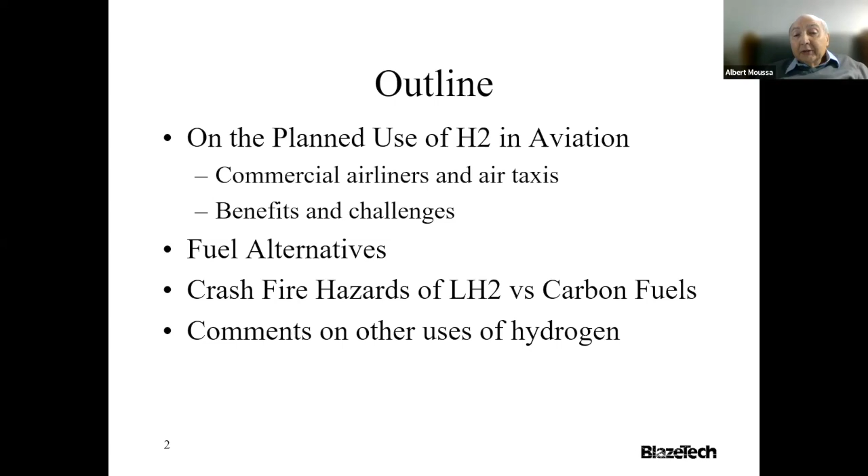Thank you, Ron. You've heard the title of the talk. I'm going to talk about the planned use of hydrogen in aviation, covering commercial airliners as well as air taxis. I'll talk about the benefits and challenges of each, and compare hydrogen to other fuel alternatives. Then I will present a quantitative comparison of the crash fire hazard of liquid hydrogen versus carbon fuel. I'll end with a few comments on other uses of hydrogen, particularly blending it with methane, as well as its use in transportation like cars and trucks.

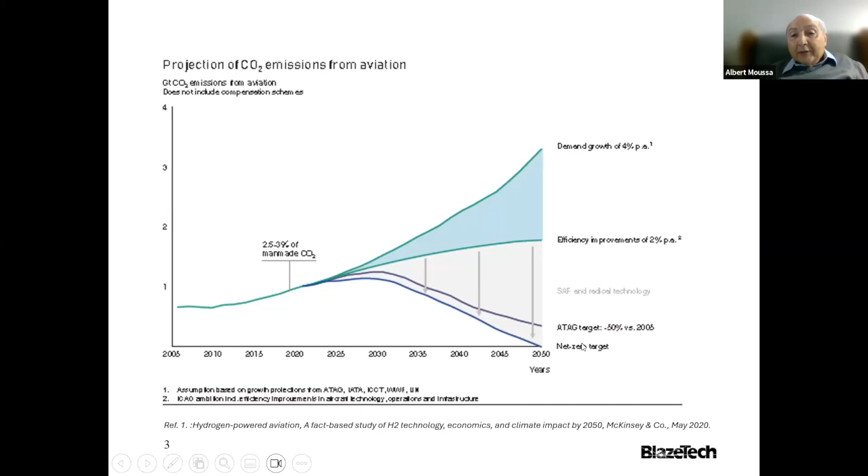Now let's look at what emissions come from aircraft by various species. These emissions happen at high altitude and produce contrails, which you can see at the bottom of the slide, and that's not desirable. I'm showing CO2 emission in kilograms per kilogram, comparing jet fuel with green hydrogen - and all we're going to talk about is mainly green hydrogen. So obviously going from 14 to 0 is a big change.

If you look at water, water will actually increase if you use hydrogen - about 30% more, going from 6 to 9. NOx emission is in the order of ppm either way, except that if the hydrogen plane uses fuel cells instead of engines, it could go to 0. Likewise for soot, it goes from traces to 0. Mind you, these four elements I listed can also trap radiation, and the bottom three constitute almost a doubling of the CO2 impact. So you can't only look at CO2 emission.

Now, if you have liquid hydrogen on a plane, it has to boil off, meaning it has to evaporate to make up for heat input to the plane over time due to the hotter air outside. The estimate of that boil-off is 1 to 3% per day from the tank, meaning pure hydrogen vapor will be shooting out into the atmosphere. Now, the global warming potential of hydrogen is 12 times that of CO2, so one has to integrate all of that into the comparison.

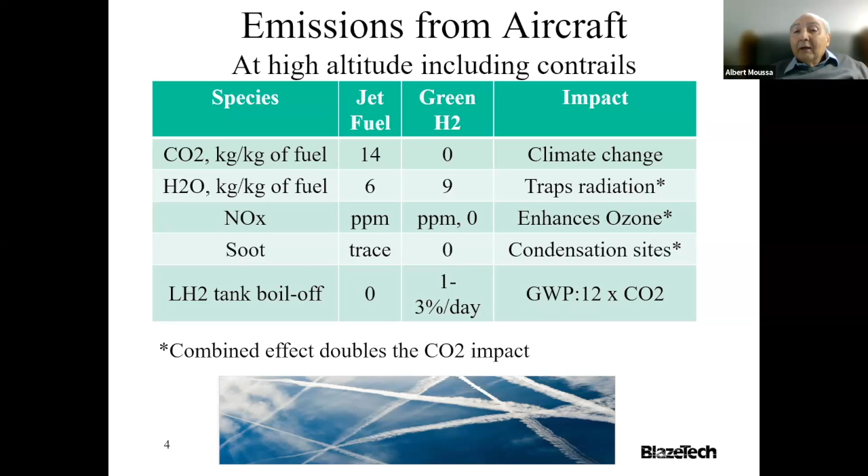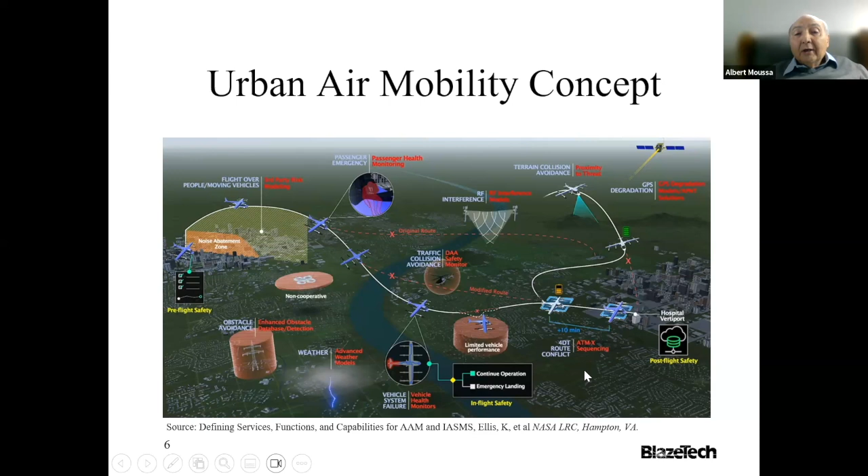What you have is a lot of very small vehicles, some manned, some unmanned, that will drop cargo at your home or serve as air taxis. For that to happen, there will need to be a lot of heliports at different locations within the city, along with storage—some for hydrogen, some for electricity.

Now, the two kinds of vehicles I'm talking about are the cargo vehicle and the air taxis.

The cargo vehicles you've probably seen are all rotor driven, very light at 55 to 100 pounds, battery operated, and unmanned. Some have already been certified to operate in suburban and urban areas, since the FAA is concerned about them crashing and hurting people.

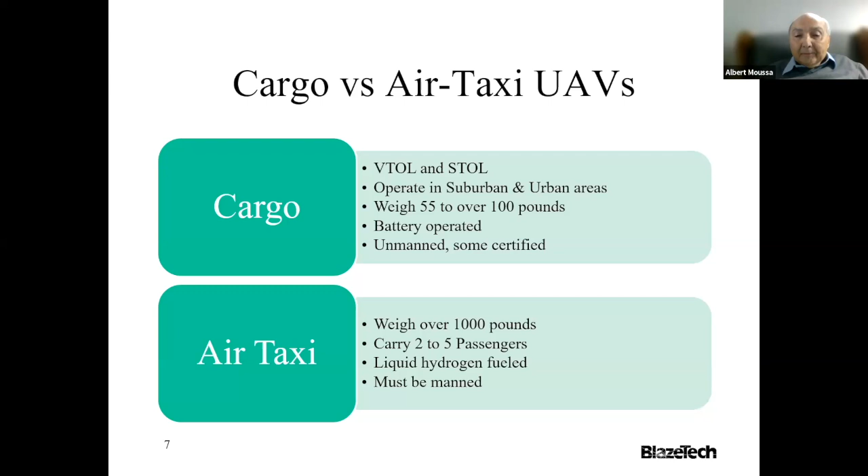The air taxis will be much heavier, 1,000 pounds and up, carrying 2 to 5 passengers. So far, the thinking is they'll use liquid hydrogen fuel, since you need hydrogen in a very compressed, small volume, and they'll be manned.

Here are pictures of the cargo UAVs. They all have rotors—you can see the ones by Amazon, DHL, and Flytrex. Some have already been certified and will come to your home to drop cargo in your yard.

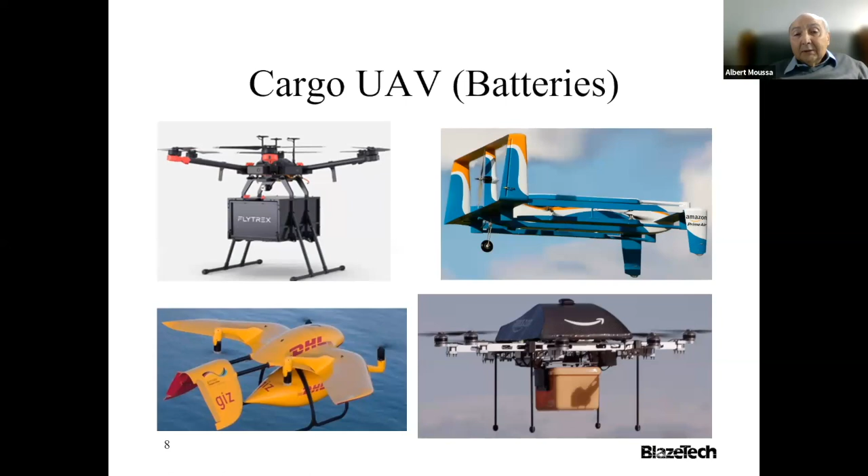The air taxis are really different and will essentially replace helicopters. That's the idea. Joby is the biggest player in this, and they just bought H2fly, which had a recent demonstration that went 500 miles. Most of these will be less than 500 miles, more like 100.

Look at the design of the plane. In the H2fly, it's got two fuselages, and in the middle, another fuselage for the propeller. The pilot and passengers will be on the right side, and the circle indicates where the hydrogen is.

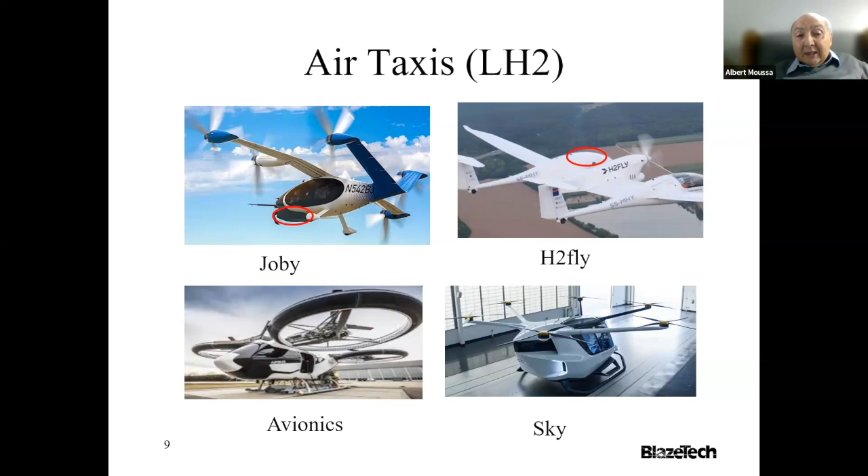So imagine how different is the design of the plane to accommodate the hydrogen. If you look at Joby, the hydrogen tank is under the fuselage, and so is it in the other ones. Again, that tells you you're going to be really developing new designs just to handle the hydrogen, and obviously there are complications in how to prove that they're safe, etc.

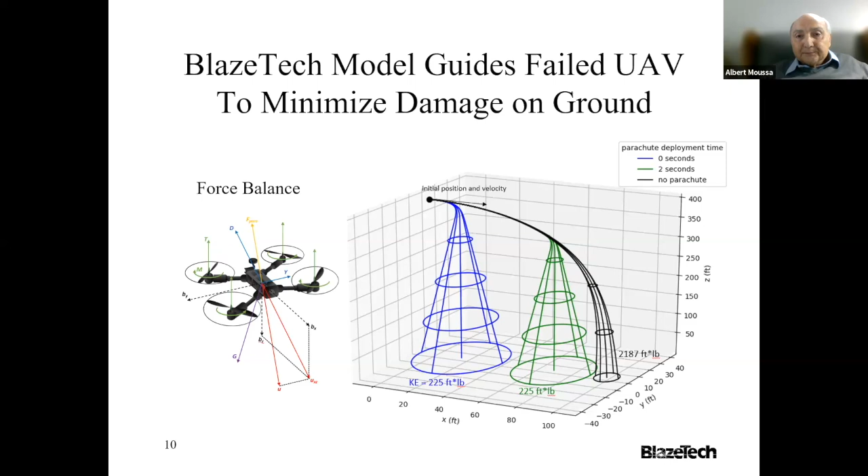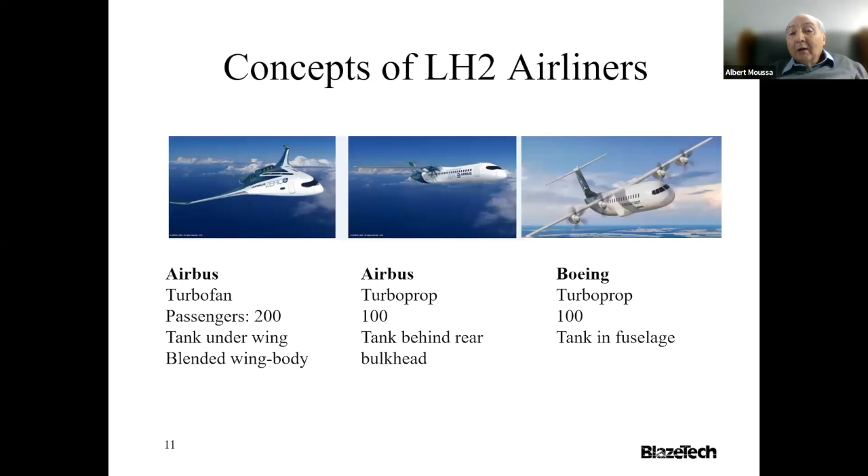Now, when you talk about hydrogen, it's important to think about what source it is, and some of these sources now are given a color. So we've been talking about green hydrogen, which essentially comes from a source like wind or solar, which provide electricity, but it's intermittent. Therefore, you want to be able to store it, and it's more efficient to store as hydrogen as opposed to batteries, and cost-wise as well. But to do that, you have to hydrolyze water, and that gives you hydrogen - that's your green hydrogen.

Now, the gray one, you are using methane and steam, and basically you are reforming the methane through the gas shift reaction, and that gives you hydrogen and CO2. So that's why it's gray, because it's not as clean as green hydrogen.

Now, there are other sources of hydrogen, including naturally occurring, which comes from the earth or the ocean, but these are very new. The old ones, of course, are coal gasification, which is not very desirable, or the blue one, which is again natural gas like the gray, except you capture the carbon. So that is better from an environmental point of view. And of course, you could use nuclear power instead of electricity to drive the hydrolysis reaction and get green hydrogen.

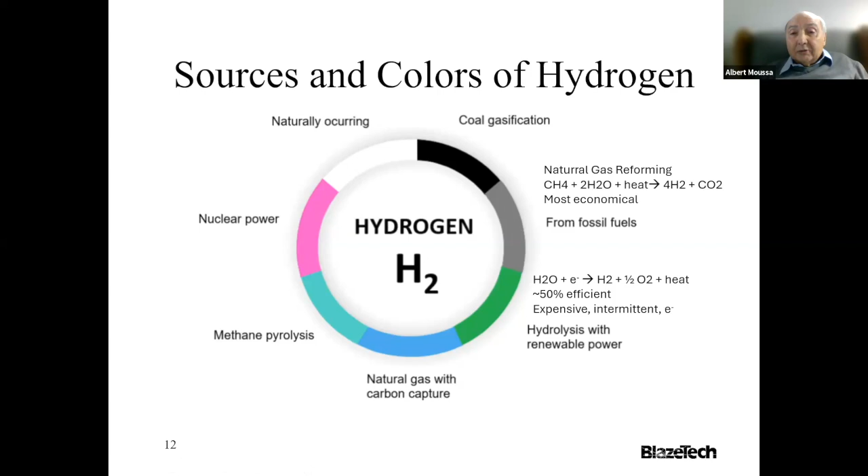Now, the engine efficiencies between the turbine you could have in a normal plane versus a fuel cell, which are really better engines for hydrogen since they take full advantage of it, is quite different. You have gasoline and diesel, but we're not going to talk about that now. If you look at the gas turbine, there's a whole range depending on the conditions and the type of engine. So 20 to 30 is probably reasonable, and fuel cell 40 to 60.

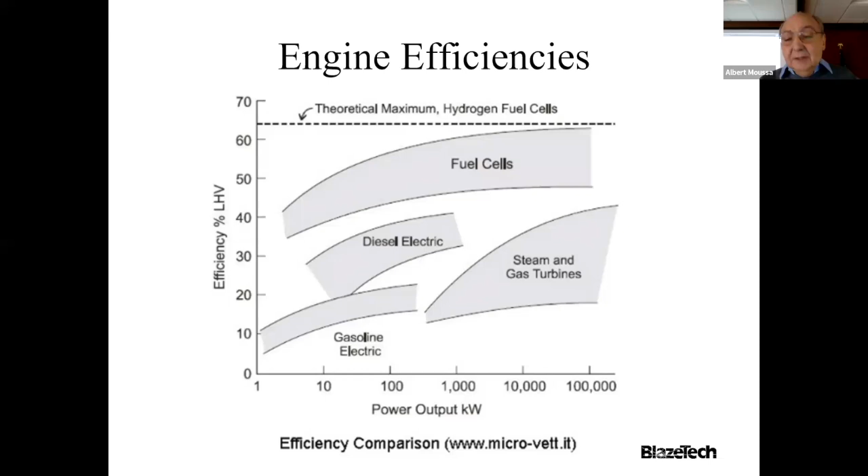I'm going to take the midpoint on these in my next slide, which shows the alternative fuels for aviation. The top one is the battery, then SAF, I defined what that is, and liquid hydrogen. You look first at the energy content, and you could look at the energy content per unit volume or unit mass. Then the fourth column is the efficiency, and these are numbers I've taken out of the previous chart. You can see there's a big difference in efficiency.

The battery is 90%, SAF 25% because you're going to use an engine. Liquid hydrogen is 25 if you use the engine and you really have a thrust to push the aircraft. But if you use a fuel cell, you're producing electricity which drives a propeller, and the efficiency is much higher, 50. Now, if you combine the efficiency with the energy content, you get these last two columns, effective energy content. You can see that battery is way low, so battery will not be used for these large aircraft, only for those that drop little cargoes in your backyard.

Now, if you compare SAF and liquid hydrogen, SAF beats it on volume, because hydrogen is very light, and even when you liquefy it to liquid hydrogen, it is still lighter than jet fuel. But on energy, hydrogen wins, and whether it wins or not, by how much, depends on the type of engine. So it's a very complicated picture.

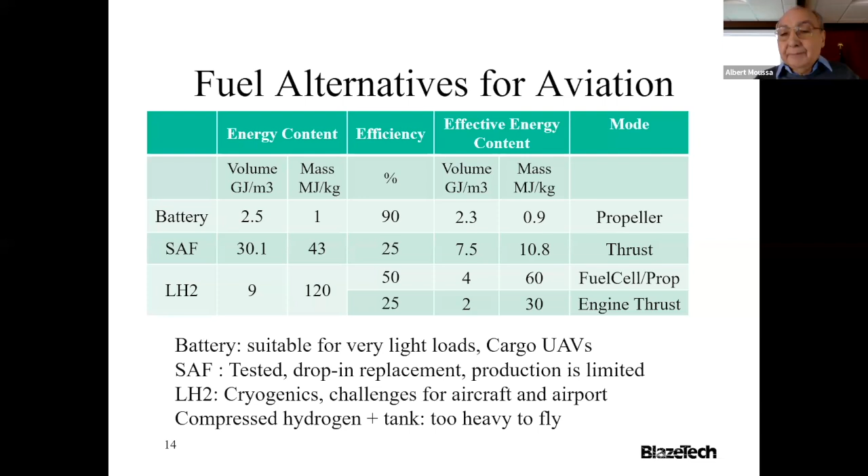Now, what is sustainable aviation fluid, SAF? It's basically a fluid that has the same chemical composition as Jet A, but produced by either crops, wood, oil seeds, algae, or waste from grease, from plants, FOG. FOG is fat, oil, and grease. These are all renewable, essentially, and if you use them, you're reducing the CO2. As a matter of fact, that's how you go CO2 neutral, because you're using stuff that captures CO2 from the air, and then you're using it for aviation.

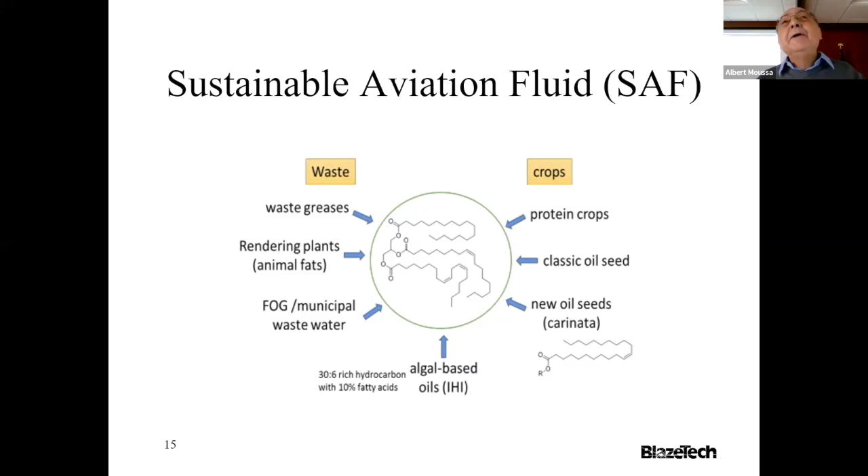As I must say, Airbus tells me that we can run on SAF, we can buy it, but it's not produced in any large quantities. Now, in the Chicago airport, United Airlines is funding a large company as an investor to produce SAF for use by United Airlines, but that's going to take a few years.

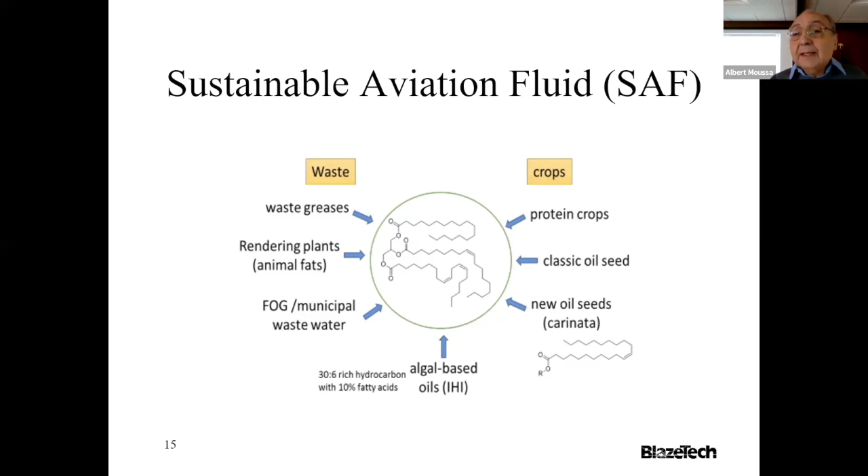All right, now, the interest in hydrogen aviation goes back to the 1970s, and it wasn't due to decarbonization, but because of the oil crisis, if you remember '73 and '79. And the FAA had a rule that said no new system or fuel on the aircraft can be adopted unless you can demonstrate that the risk to passenger and public is no worse than current use. Okay? Otherwise, you don't get certified.

That's very important. Now, at that time, in the late '70s, NASA funded a study on a quantitative analysis of crash fire hazards to compare liquid hydrogen with carbon-based fuel. Now, I did that study, I was at Arthur D. Little at the time. And basically, they wanted us to focus on a failed aircraft during takeoff or landing, and it's survivable, obviously. If it's not survivable, then who cares about the fuel?

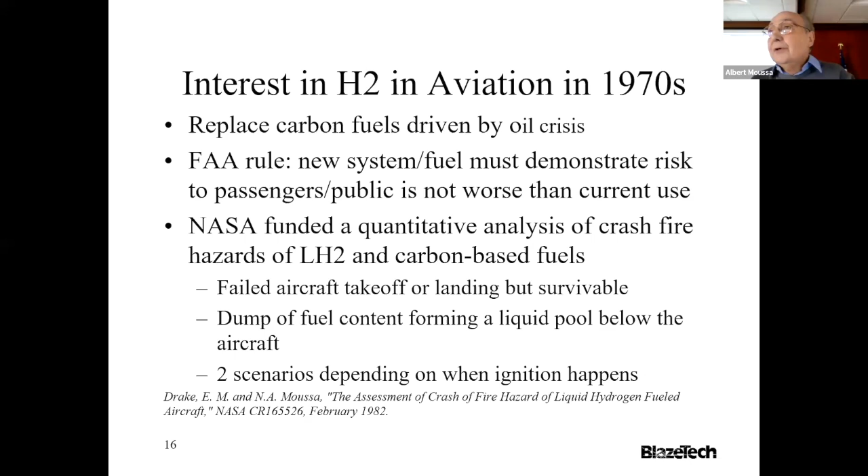Assume worst case, dump the whole fuel content and see what happens. We looked at two scenarios, depending on when ignition happens after the release of the fuel.

First, I'm going to talk about some general safety considerations before talking about the scenarios.

First, comparing liquid hydrogen to Jet A. Hydrogen has some issues that don't exist with Jet A, like hydrogen embrittlement. Being a very small molecule, it could penetrate into the aluminum structure or any metal, and that makes the aluminum stiffer and more brittle.

It's also a cryogen, so you have the boil off. It has a very wide flammability limit, 4 to 75% on a volume basis, compared to Jet A, 0.7 to 5%. So you could drop Jet A and it may not ignite.

It's not easy to ignite, actually, but it can ignite in a crash situation. The spark energy needed for ignition is 10 times less for hydrogen. So if hydrogen leaks, it's going to ignite, you could be sure of that, unless it dissipates. I'll talk more about that in a minute.

The other thing is the hydrogen molecule, because it's small and its thermal diffusivity is very high, the potential for leakage is high compared to Jet A. So you see, it's tough to compare the two.

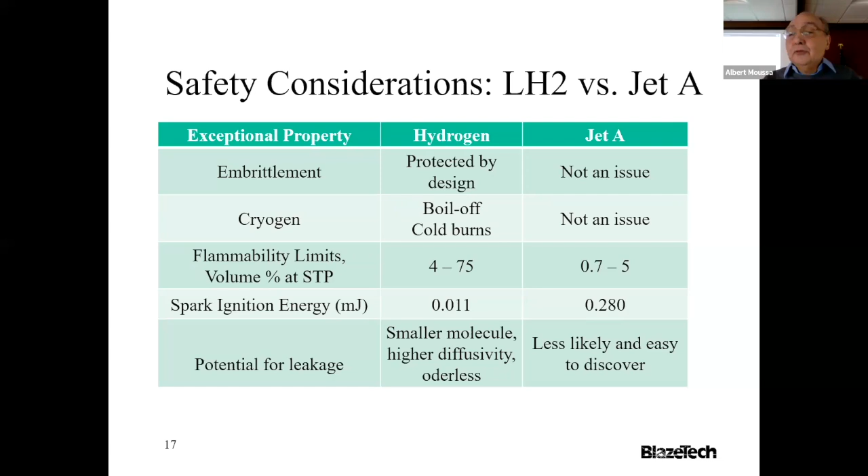One thing that is not known to most people, and these are really new findings from 2 years ago by the FAA, is that most material flammability are, of course, highly flame resistant. Otherwise, you cannot put them on the aircraft.

Now, if you're using hydrogen in a tank and it leaks slightly inside, what the FAA test determined, as you could see on the left side, these are tests where you could put a flame to the material in the plane, and it will burn. But when you pull the flame away, it has to stop burning, self-extinguish within a particular time, and the flame height should not exceed a particular value.

Now, if the test is done at 1%, you see that burn region increase a little bit over 0%. If you go to 2%, it goes much higher. Then look at the chart, which goes from 0, no hydrogen, all the way to 4%, which is flammable.

Now, flammable, obviously, hydrogen will burn. But the point of the graph is if you have a very small amount of hydrogen, it can help other things burn. And you could see that the duration of the burn goes up and exceeds these horizontal lines, which is the minimum. And likewise, the flame length goes up and exceeds the horizontal red line. You get the picture? So you don't want hydrogen to leak in the plane, obviously.

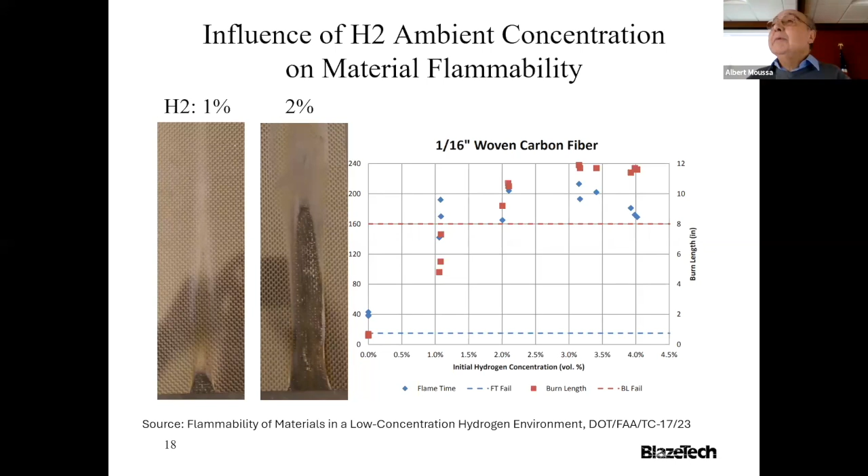All right, now let's go back to the scenarios. The one where you don't have immediate ignition. So you've dumped the whole content of the aircraft, and hydrogen, because it's coming at 20 degrees Kelvin, and the ground is at about 300 Kelvin, or 70 F, the heat transfer is very high, so it's going to boil like crazy.

It's a cryogen. And depending on the wind, it's going to flow, you could get a plume, and it might dissipate if there's no ignition sources. However, depending on the wind, it could go somewhere, and if you're in an airport, it could go to the building or downtown. These plumes could go long distance. And the confinement of buildings and the plentiful ignition sources in buildings, be it light or cars or whatever in the city, can be an issue.

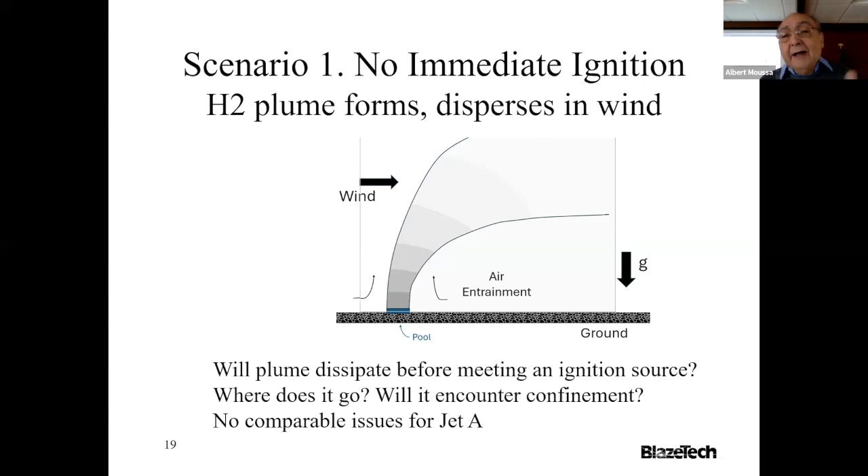So the big question is, where does it go? Will it be confined? And there is no comparable issue with Jet A. The plume from Jet A is dirty. It might put soot around the area. You have to clean that up, but it doesn't have that hazard, the plume hazard, which is fire and explosion, particularly if you have confinement.

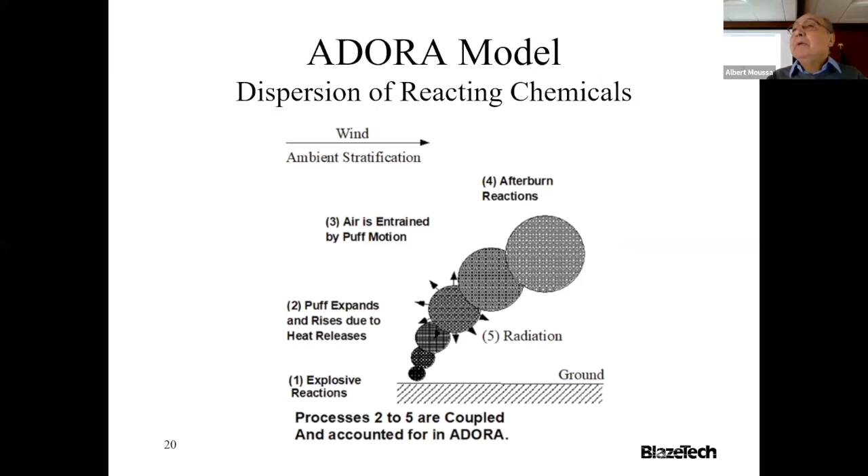So, by the way, we developed a model at BlazeTech that analyzes that specifically, including whether the hydrogen will react and burn or detonate. And we work it for hydrogen or any other fuel all the way to explosives. So that model could have been used in the FAA study, except it wasn't available then, but it can be now. That model is called ADORA, atmospheric dispersion of reacting agents.

And most dispersion models just assume that what comes out is inert, not going to react with anything. It's basically going to dilute, of course, because it's mixing with the air. All right, now we move to the second scenario, which is immediate ignition.

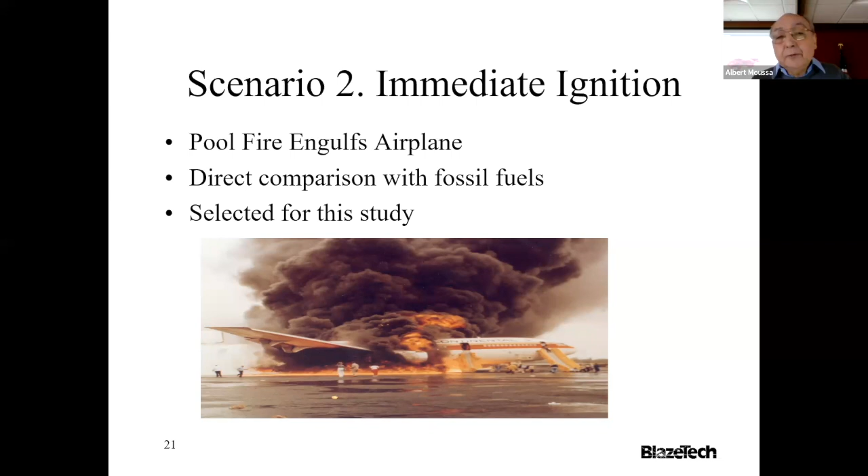So that's what happened in a pool fire scenario that engulfs the plane. And here we can do a one-to-one comparison between hydrogen and fossil fuel, or carbon fuel. And that was then selected for the NASA study.

At the time, Lockheed had actually a design for a regular airliner using liquid hydrogen. This was a 400 passenger, Mach 0.85, 5,500 nautical miles plane. That's your typical plane that gets you across the States or across the Atlantic.

If you look at the plane here, you see that shaded area in the back of the plane, and there's another one in the front of the plane, and that's where Lockheed, in their wisdom, put the hydrogen tanks. These are cryogenic tanks, liquid hydrogen tanks, and they did a lot of work to design them to make sure of the right size, mass, etc. However, these tanks will isolate the cockpit from the cabin, and that's not acceptable in aircraft design. So other planes, the Boeing and the Airbus planes, had different designs which overcame that. But at the time, Lockheed, that's what they had, and that's what they gave us.

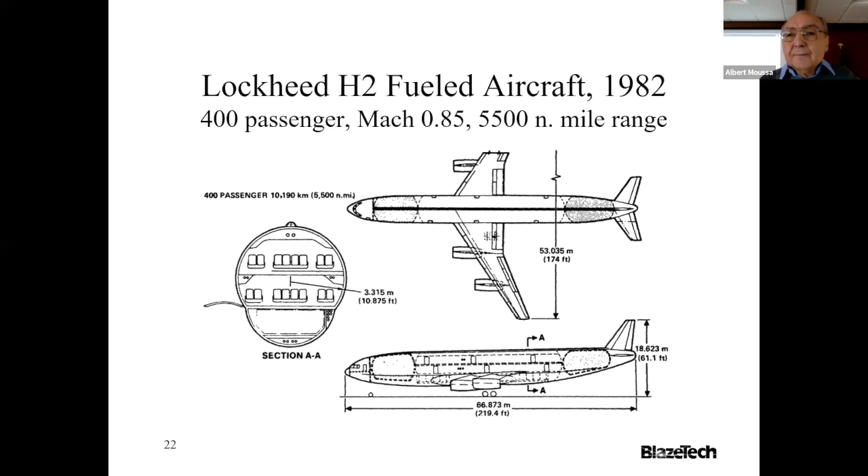Given the fact that the design of a liquid hydrogen tank is so different from a Jet A, it was very difficult to do the comparison, but we overcame this difficulty. First, let me tell you about comparing the two cases. The amount of volume on the aircraft for Jet A is one-third hydrogen, okay, hydrogen is more bulky. The mass is the other way around, so hydrogen is even less than one-third of the mass on board.

If you look at the total content of fuel that will be consumed in that 5,500 nautical miles, that's in terajoule, hydrogen is 20% less than Jet A. So actually you're saving joules, which is really ultimately the way to say it. You don't care whether it's coming from Jet A or hydrogen, it's less. And I presume that's because the plane is lighter if you just compare the weights of the two fuels. So that's a big plus for hydrogen.

Now, the fuel tank design is very different. In Jet A, it's a single wall, they call them wet wings, meaning the wall of the wing is the container of the fuel. While in hydrogen, you have double wall with insulation, and its location is different. So if you're looking for identical crash landing conditions, meaning the plane is going to crash with the same velocity, angle, deceleration, the terrain is the same, the damage to these two aircraft designs and fuel tank designs will be very different. Different amounts of fuel will be released at different rates.

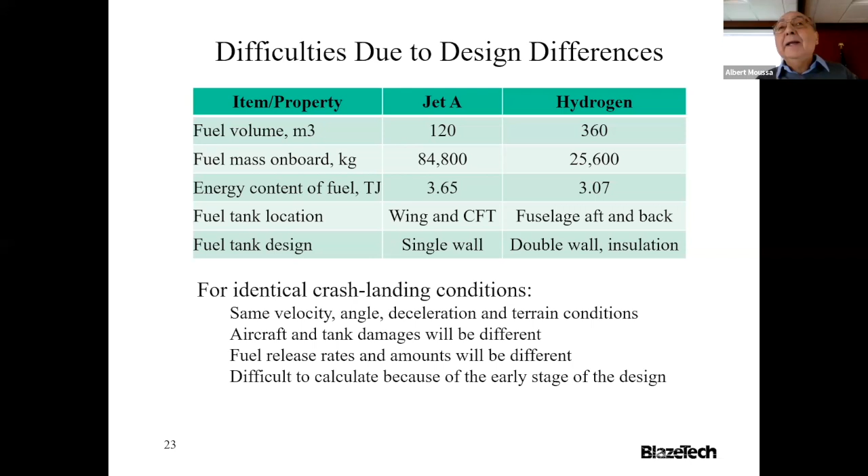So our approach was to do modeling, and that was the objective. Of course, you couldn't do anything but modeling. You couldn't test these things in terms of airplane design, etc. So in the approach we assumed in the comparison, the same volume coming out or same energy for both fuels. Now we know that's not correct, but we don't know what they are. So we said, okay, we're going to compare them on a one-to-one basis that way.

Let's see what happens. For each of these releases, we calculated the resulting pool fire in numbers. NASA wants direct comparisons, so we calculated the thermal output, the duration of the fire, the thermal dose, which is the integral of the heat flux over time onto the fuselage, and compared liquid hydrogen with the 3 carbon fuels of interest at the time: liquefied natural gas, kerosene, and gasoline.

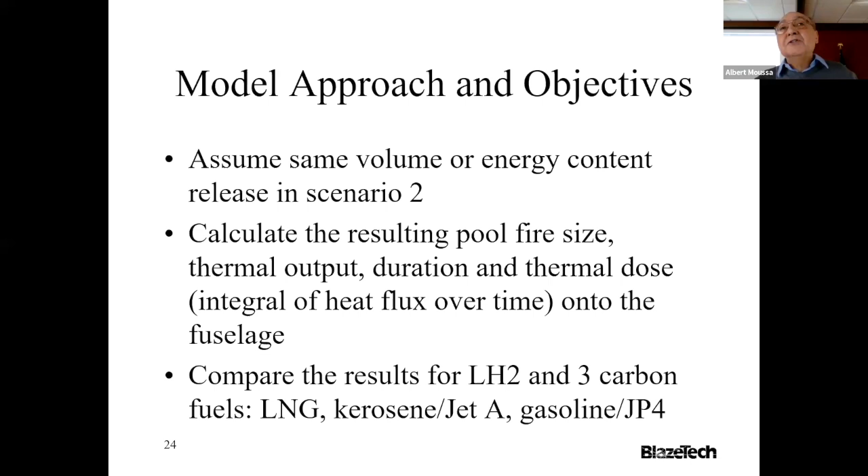I think the interest in liquefied natural gas disappeared because it still has carbon in it. This is so it doesn't help decarbonization. It helps in many other things, and we use it here in Boston. We get LNG, and we use it.

All right, so the model here is basically a flame that develops above the pool, and the flame will have some sort of cylindrical shape. The inclination of the shape could depend on the wind. If it's just burning, it goes straight up. If there's wind, it could bend. And in both cases, we have that film of fuel that has been dumped.

Now, for jet fuel, that film is getting heat from above, from the flame, and that makes it evaporate and burn. For liquid hydrogen, it's getting heat from the flame as well as from the ground. And that's very important because that delta T, delta temperature, ground to hydrogen, is very high.

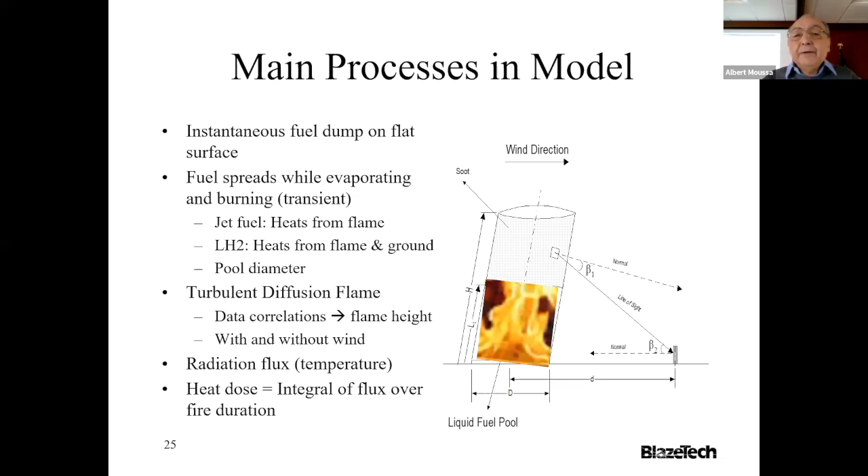So we calculated that to see how much it will evaporate. And there were correlations to say, okay, if it evaporates at this rate and it has the following fuel properties, it's going to have that height. And of course, things burn at different temperatures. Depending on how well they mix, we could get the radiation flux and then the heat dose, which is the integral of the flux over the fire duration. And we did that.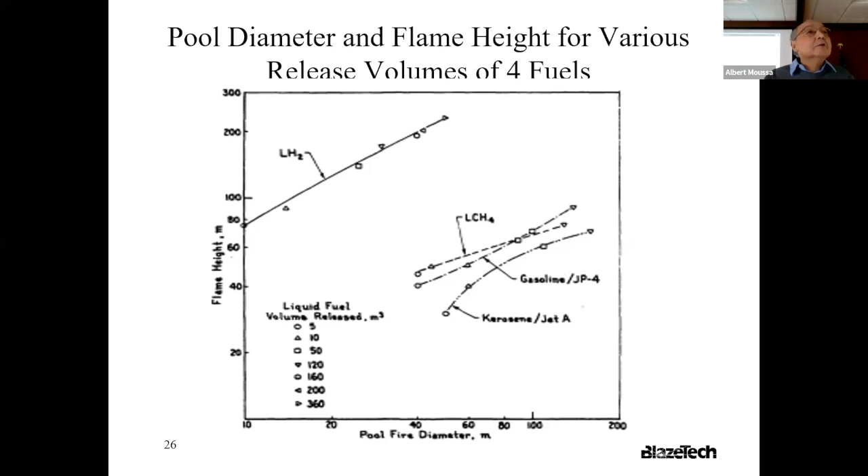If you look at the triangle, which is 10 cubic meters per 10 cubic meters of hydrogen released, then you get that point on the liquid hydrogen curve, which has its own diameter and height, very different from the points on the other curves, which have different diameter, different height. Every fuel does its own thing, so to speak. So that's kind of the results of this calculation.

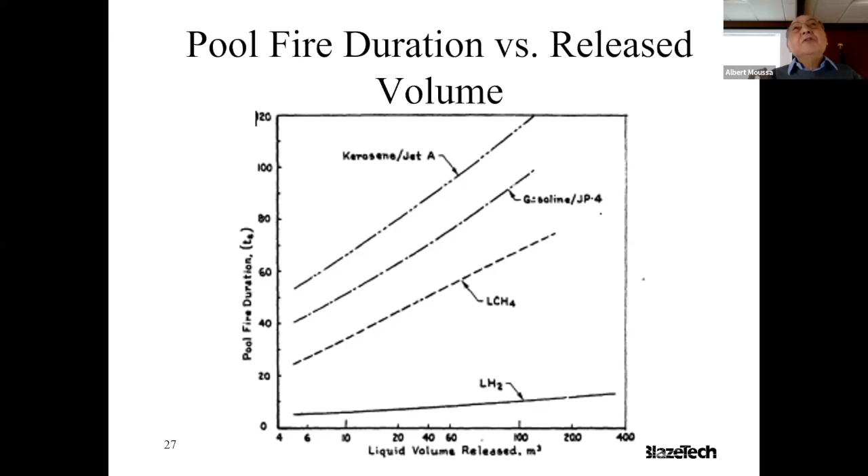The other is the pool fire duration. Again, liquid hydrogen lasts a very short time compared to the other fuels for the reason I gave you already. If you look at how they stacked up, it's related pretty much to temperature and volatility. The easier thing to burn, obviously, is going to burn faster or earlier. The easier thing to ignite, because of higher volatility, is going to burn faster or with a shorter duration.

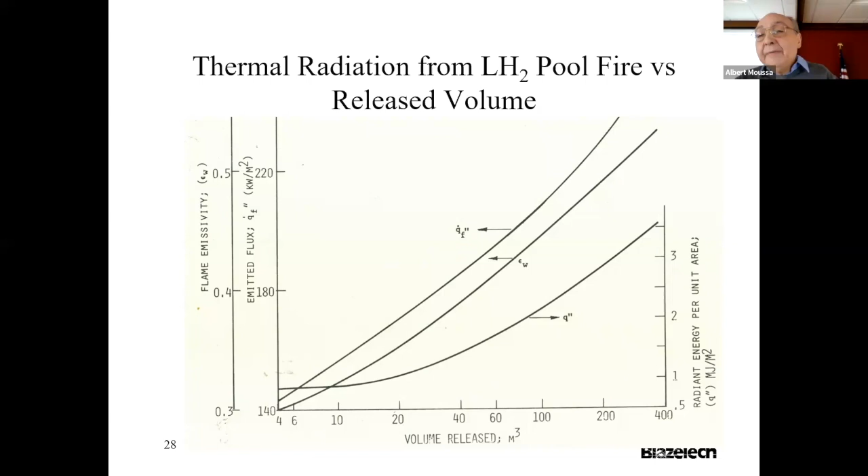Now, this is what we did for each fuel: we calculate the emitted flux, which is this curve, which depends on temperature and burning rate, the emissivity, how much of that emitted flux goes on the fuselage or the tarmac, and then the heat dose, which is the integral of heat flux over time. So the heat emitted is kilowatts per square meter. When you integrate that, you get joules per square meter, and that's what the units here are, it happens to be megajoules just because it's so much.

Now we can compare that integrated thermal dose for the four fuels. You could do the comparison in different ways, as a function of the released amount.

And that's what I'm showing here. You can see that hydrogen is below the other fuels. Interestingly, each point on that curve represents a different accident, or rather a different amount of liquid released. We don't know which accident, but it didn't matter what liquid you assume, because hydrogen came out always lower than the other three. So given the same test conditions, we may have a point for hydrogen here and a point for the other fuel elsewhere, but it doesn't matter because hydrogen is below.

And that's really what we're trying to do. We have to show that hydrogen will cause no more damage, less risk to passengers and people than these other fuels. So that difficulty we had, because we couldn't analyze, given the same accident, how much fuel will come out, was resolved by looking at the results of our analysis.

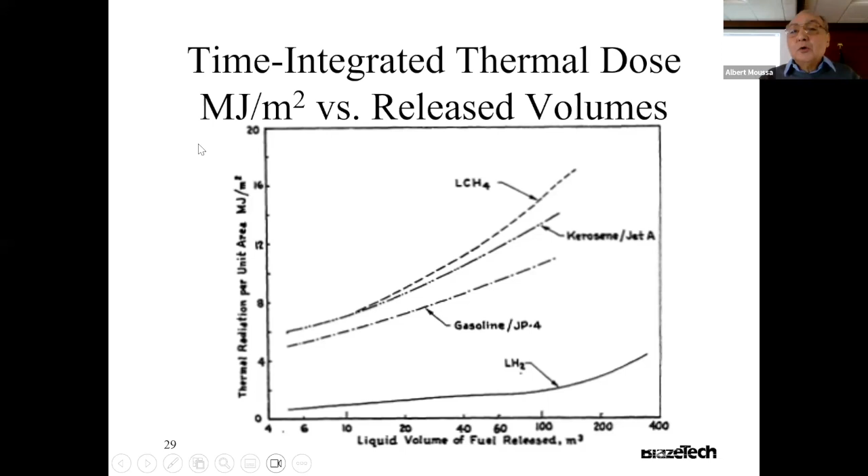Now you see here, this is megajoule per meter square, that's the dose. Now you could also look at the same dose as a function of not the amount of volume released, but the energy released. So you multiply volume by the heat of combustion of each. And hydrogen was also lower than the others.

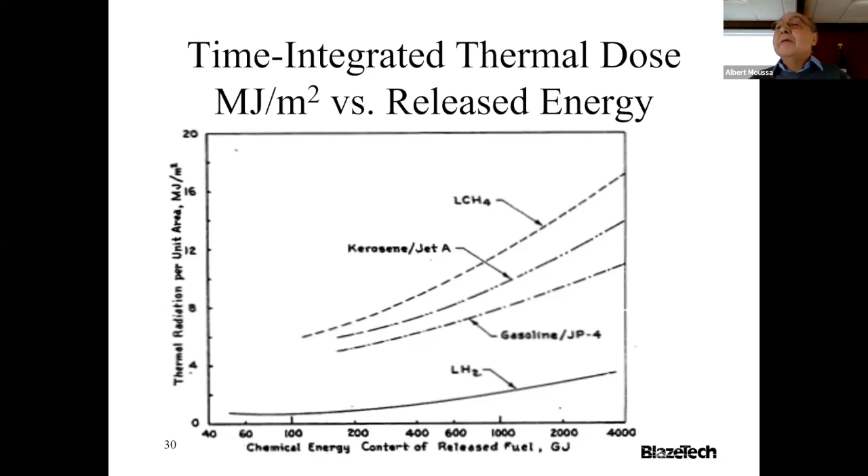So it actually does justify our conclusion, which is for crash pool fires, the hazard from liquid hydrogen fueled aircraft is less than the other fuels, or no worse anyways. That's for the FAA.

The presentation I made was for instantaneous releases - if it's 5 cubic meters dumped immediately, the whole tank dumped immediately. We also did it for continuous releases, and the results are very similar.

So now what's needed is a direct validation of these hydrogen results. Of course, these were done in 1980 - well, the report came out in '82, but that was started earlier.

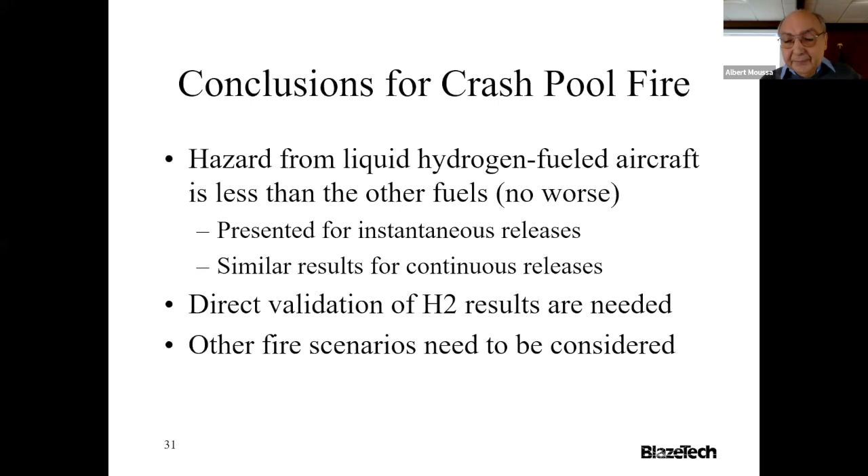There are other fire scenarios that one has to keep in mind - you can't just talk about the pool fire. Obviously leakage is very important, confinement is very important. So much for hydrogen aviation. And because of the interest of this group, I thought I could do some comments on other uses of hydrogen.

One is blending hydrogen with natural gas. The gas companies are really pushing for that - they are funding hydrogen projects. Why? They want to maintain their network. If decarbonization means no methane, what's going to happen to that whole network? So what they would like to do is blend them. And of course, in the limit, if we ever get there, you push hydrogen instead of natural gas. Now there are issues with that, of course.

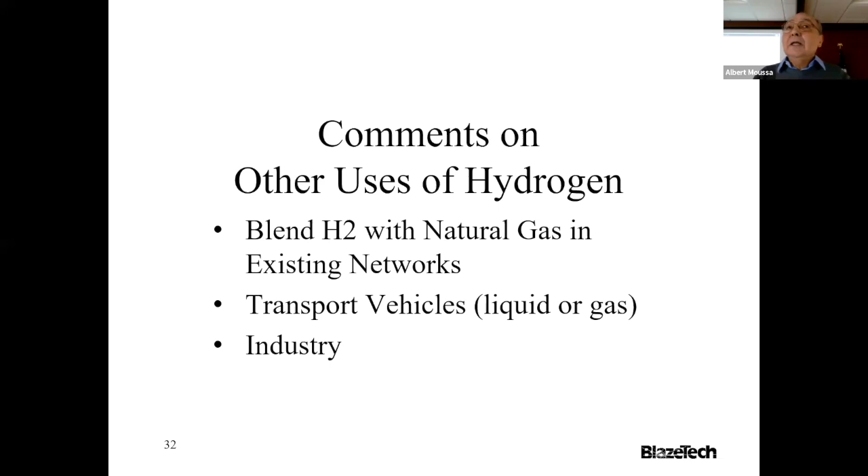So that's one item. The other is transport vehicles - you could use hydrogen as a liquid or gas depending on the vehicle. And then use of hydrogen in industry. So I'll comment on these.

5 have already been signed during the Biden administration, and 2 were not, and we're not sure what's going to happen. But these 2 were in red states, so there is a chance they'll continue. By the way, New England did bid and didn't get it.

Well, let me just say that the purpose of the hub is to overcome all these infrastructure issues that I mentioned. First, you have to produce the hydrogen, then how would you store it, when do you use it - gas versus liquid, et cetera. That's the purpose of the hub. There are small differences depending on which hub, and California is way ahead of everybody on these - they actually started years ago.

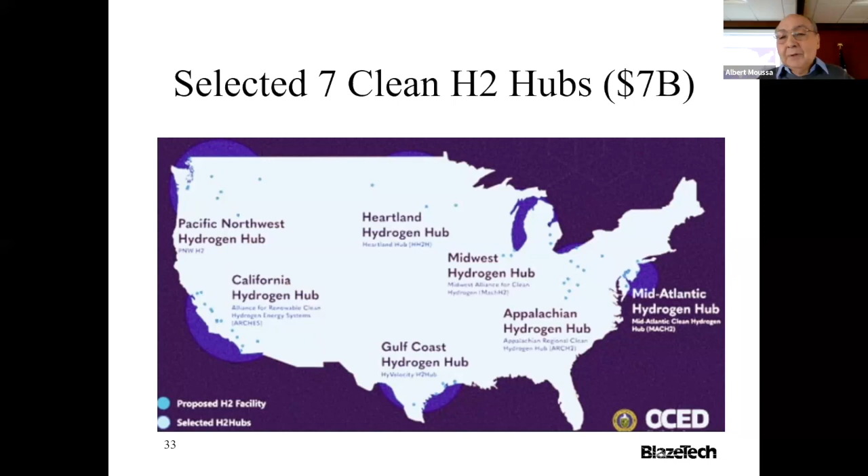All right, so back to blending hydrogen with natural gas. First, let's just look at a general natural gas system. Gas comes from either wells or LNG delivery like we got in Boston. It gets processed, then gets stored or pumped. Now that means you have big compressor stations pushing the gas, and they use gas to push it. That goes to the city. You see a branch here that goes to power generation or large industry, separate from the city. Once it goes to the city, now the pressure drops significantly.

I think it's about 1,000 PSI at the compressor level, about 200 PSI at the city level, and then it goes to commercial, residential. When it gets to your home, it's inches of water. Of course, you don't want the high pressure of gas. You have high pressure of water, 60 PSI, but not gas. So that's kind of the standard distribution system.

And if they combine hydrogen to it, you see that hydrogen will be coming again from solar or wind, and then it's going to go hopefully directly to the consumer volume or to the city requirements. That's kind of the vision, but it will be compressed.

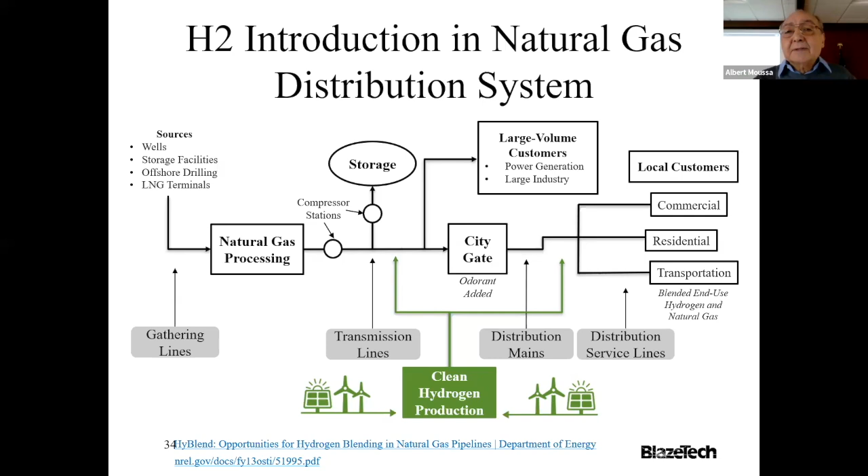Now let's look at blending of hydrogen and natural gas. This is hydrogen in the gas form. If you compare the mass, the joule per kilogram doesn't matter whether you're gas or liquid. Obviously, mass is a mass, okay? But by volume makes a big difference, and actually depends on the temperature and pressure. If you look at hydrogen per unit mass, it's obviously much better than natural gas, more than 2 times. When you look at it per volume, then it's the opposite.

And what's important for the distribution system is the volume, because these compressors push things. The bigger the volume flow, the more you have to push. That means more pressure loss in the line, and you need better compressors, or bigger compressors.

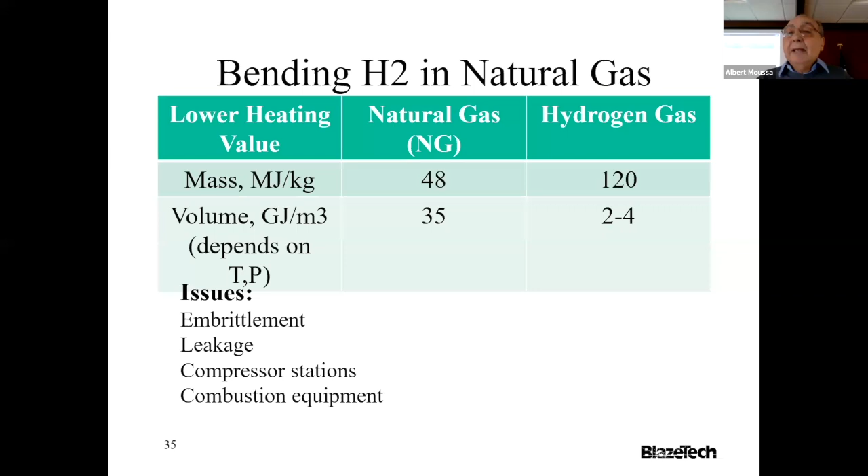Now, the issues are still issues of embrittlement, leakage, flammability. And of course, I mentioned that earlier, that they're the same. But then the compressor station will have to be upgraded, depending on where you're going to blend, and the combustion equipment on the compressor station.

So let me review that very simply. You need a larger compressor to make up for the pressure loss from the lower energy per unit volume, or you use the same compressor and derate your system. Now it's pushing the same amount, but you're not getting as much energy.

These compressors are usually driven by gas turbines. And by the way, gas turbines are also used in power plants, where they burn methane. These are the peaking power. And people are doing a lot of studies to see how much H2 you could handle and still burn in a gas turbine, in a combustor.

There are different results, like 25%, the combustor will work, but you need some control. But of course, what's going to happen is the temperature will go up, which can produce more NOx. The company GE is working very hard to make sure these issues are resolved, and you need an emission control strategy as well. So there's some modification, but it can work.

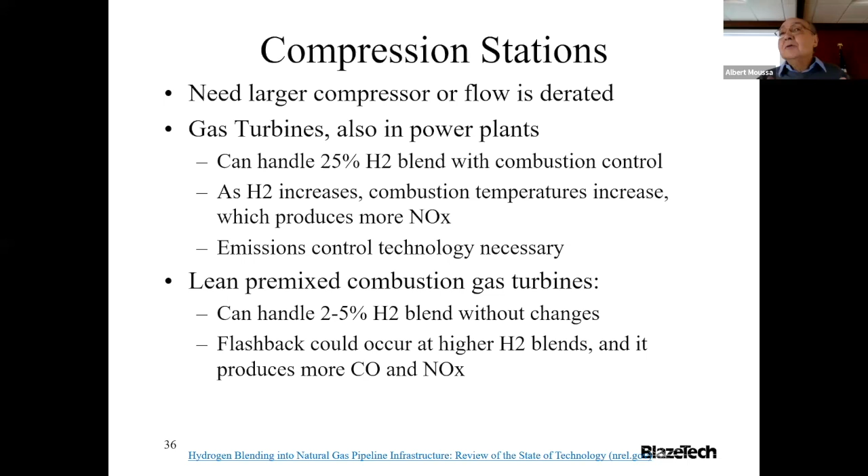The other option is a different mode of operation for a gas turbine, called lean premixed combustion. Now the gas turbine usually has a diffusion flame; they're not mixed, you inject the fuel and air and they mix in the combustor. But in lean premixed, they have advantages, they produce less NOx. But you can only use 2 to 5% if you're going to put in hydrogen. So you see, it's a lot of technology that's actually being worked on today because people are very serious about that.

As a matter of fact, there have been several projects worldwide. First, there is no international standard for H2 blending, or what percent of H2 and NG. It doesn't exist yet, so people are trying different things. The UK has been testing up to 20%, again in specific areas where you control things better, etc.

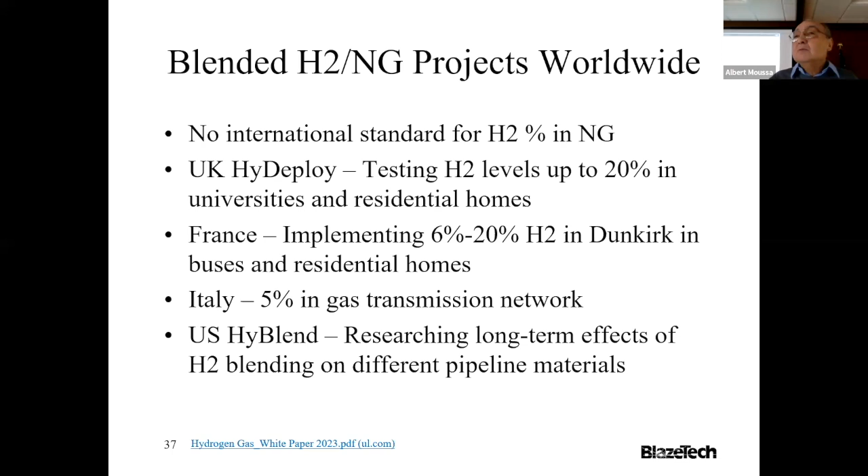France, 6 to 20%, in Dunkirk—Dunkirk, you remember from World War II. Why they selected that, I have no idea. But Italy, much less. In the US, lots of research, but no specific percentage that I know of. I've heard about 15 in some places, but it's all research.

All right, so much for blending hydrogen and natural gas, which is a very important subject in terms of hydrogen usage. Now we've switched to other usage: the hydrogen car and the fuel cell. If you remember some of the efficiency curves I showed you, it's roughly 2 times more efficient than an SI engine, because it doesn't depend on the Carnot cycle, if you know thermodynamics. And it doesn't emit CO2. So these are big advantages.

But the question is, does it make sense to use a fuel cell with hydrogen on a car? And I'll address that. There are safety issues, of course, and then limited refueling locations.

Now, California, being ahead of everybody, already had several, maybe several hundred, perhaps 1,000—I've forgotten the real number—of hydrogen cars in operation. These are the Mirai. However, they're all dependent on hydrogen coming from a single facility in California. And when the facility had an explosion in 2019, there was no hydrogen to refuel them. Toyota sent these hundreds of owners loaner cars to operate, to run, because they felt responsible.

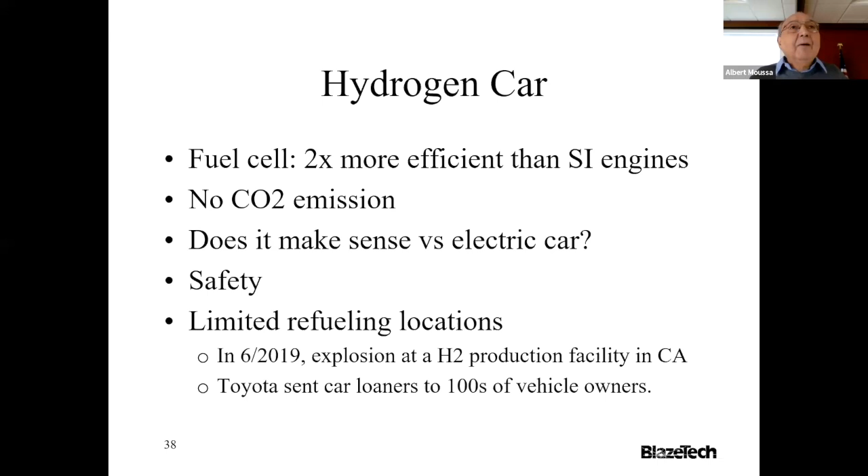Okay, nicely from Toyota. Now let's compare a hydrogen car to an electric car. If you look all the way to the left, the ideal in decarbonization is you have energy coming from solar and wind, but they're intermittent, and you want to store the excess when they're running so that you could use it when they're intermittently not running.

I'm showing 2 branches. If you put that electricity, these are kilowatt hours, into the battery, and the battery drives the car, in terms of the motion of the car, meaning electricity to motor turning, it's 90% efficient. You got other losses, but...

Now if you compare the same thing just from electricity to car for hydrogen, you gotta first produce the hydrogen. So the electricity and water will go in an electrolyzer. That produces the hydrogen. Then you have to store it, etc. And then you gotta send it to a fuel cell, and the fuel cell produces electricity for the car.

But the electrolyzer is roughly 50%, 40 to 60, I use 50. Fuel cell, 50%. So what ends up reaching the car from that, let's say, X amount of kilowatt hours of electricity that we started with is 25%, compared to 90%. So I ask you, why would you ever have a hydrogen car?

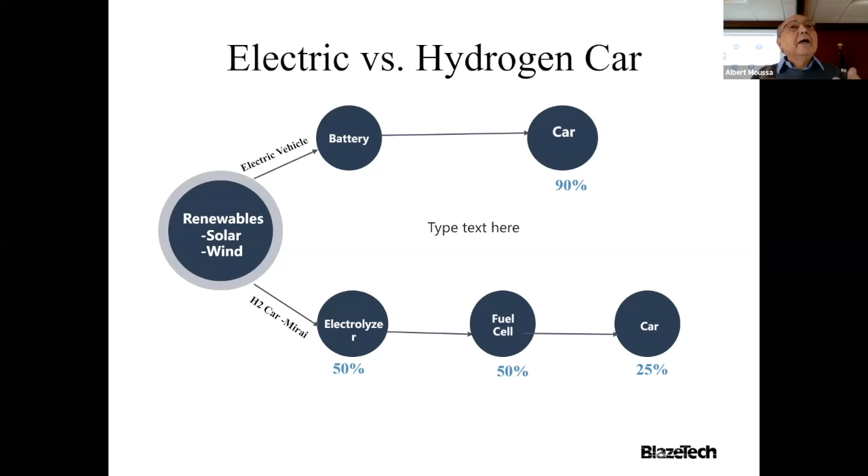Well, Toyota, of course, is aware of that. I mean, they're no dummies. And they decided to get into hydrogen, and they started with the car. Now there's thoughts that the car was a mistake, and they're going to trucks and larger vehicles.

And these hydrogen tanks are not the insulated cryo tanks, but these are more carbon fiber reinforced plastics to minimize weight. But they are running at 10,000 psi, 700 atmosphere or bars. That's a very high pressure. And you always worry in a collision, what would happen?

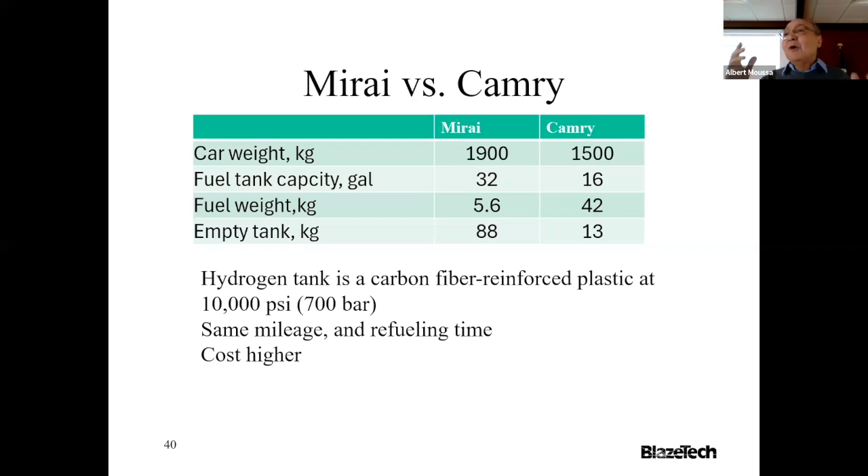Will you leak enough? And there are, by the way, videos on the web done by Tesla to show you that if you collide, you're going to lose the whole plane. Obviously, they're pushing the electrical cars.

And the comparison is same mileage, same refueling, which is good. Of course, there are other differences, and I'm not going to go through all of that. Some of you have electrical cars, you kind of know what that would be. The cost is higher, obviously, for hydrogen.

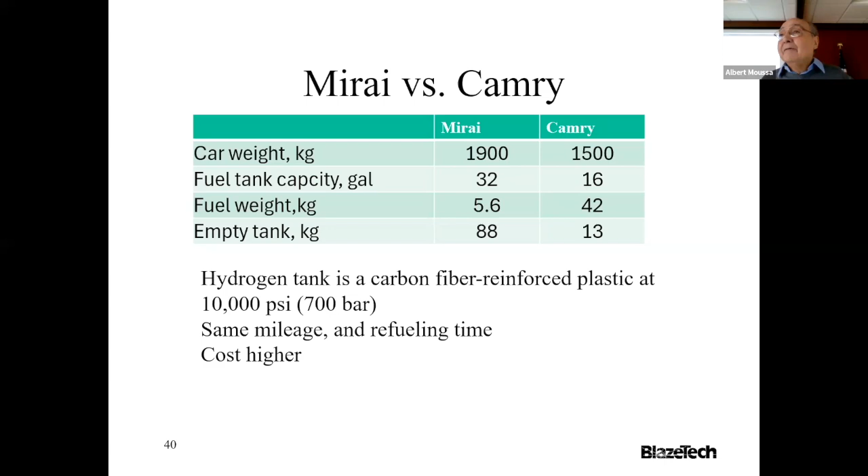Now, regarding some of the tests, I mentioned the Tesla one, which is obviously promoted by Tesla. Now, these are tests done by the University of Miami in Coral Gables, by a professor who I presume was funded by either DOE or a hydrogen company. And what they're comparing here is hydrogen and a gasoline car in a simulated collision or failure.

And for the hydrogen, he failed the pressure relief valve. So he had a nice jet because being pushed by 10,000 psi. And the hydrogen is ignited intentionally, and you get this big flame shooting up. And if you're outside, it dissipates. No one gets hurt. Even the car doesn't get heated much. The temperature inside the vehicle while this was happening was livable, was not that high. And it only lasted 2 minutes to empty the tank, because of the high pressure.

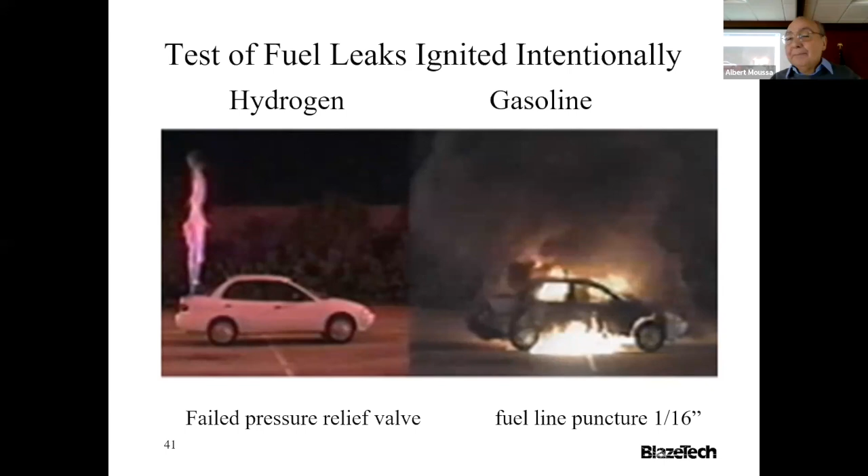Now, when he repeated the same thing by puncturing a fuel line in a gasoline car, you see the mess that is, and obviously, if you didn't get the people out, they are killed. But again, these comparisons are tough to do, and looking at one comparison is not good enough. You gotta look at a whole bunch to justify the assumption you're making.

Now, there are protections on the car and in the fuel station. So during refueling, there's a very tight seal between the nozzle and the car where hydrogen will go in, and it's locked as long as there's pressure in the hose. There are protective devices to prevent you from driving off before you disconnect it. These are on the car and the dispenser, and there are leak detection devices too.

So you see a lot of protection, obviously. Whether that's good enough or not, that's another issue. But you could see it's not simply a simple replacement. And that's why the airlines would like SAF, because literally it's a drop-in replacement.

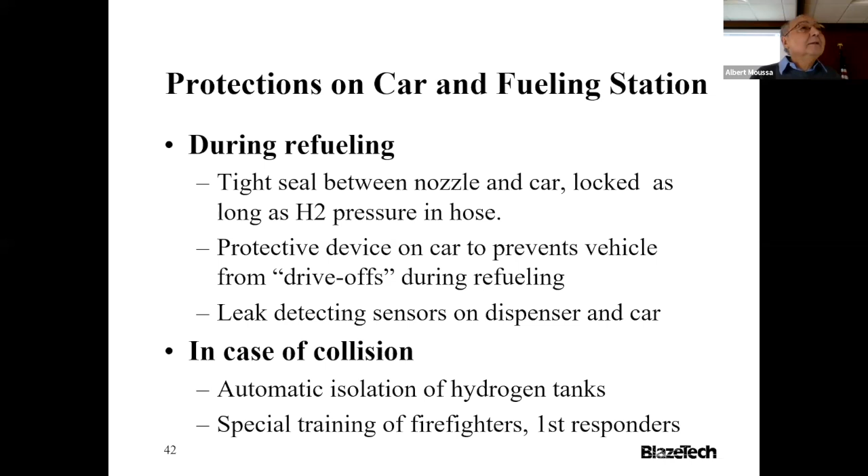Of course, we'll see how well that will work. Now, in case of collision, the tank will automatically isolate itself on the car. And of course, the other thing is you got to provide special training for the firefighter and the first responder, kind of like what was done for electrical cars. But till now, the car fire happens, and the fire department arrives, and they're not sure what to do, etc. It's not clear. So even doing that is not easy, but that's needed.

All right, so much for cars. Now let's look at larger transport systems.

Ships and trains now have more space, so if you can have a large tank, then you can go with liquid hydrogen. If you do it with pressurized hydrogen, the penalty is much higher because of the weight of the tank. Ships and trains are being designed today with liquid hydrogen, and this is one of a kind in many places, but it's happening in different countries.

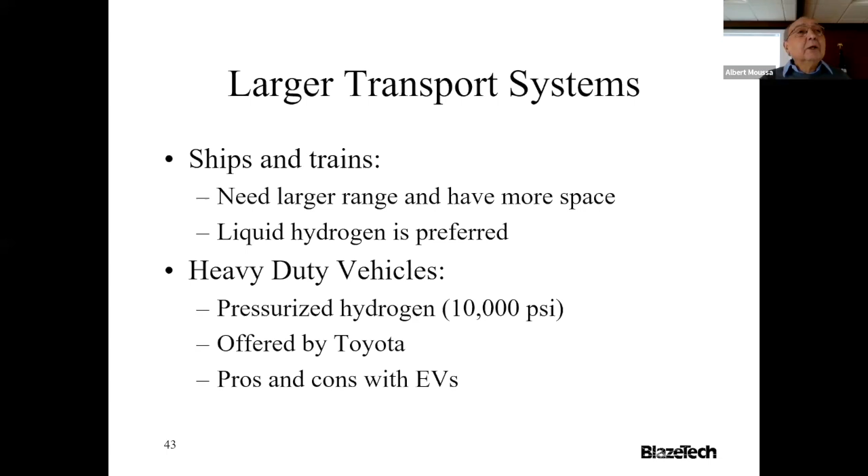When you look at trucks, it's a big issue - some people push it, like Toyota, Honda has a design too, but Tesla is also talking about trucks, and it's a big competition because there are pros and cons of each. The hydrogen people talk about decarbonization, while the EV people talk about less noise, the fact that you're lighter so you won't affect the hard top of the highways as much - though that's even true with gasoline versus electrical cars. But electric trucks will be very heavy, so that's why hydrogen's really pushing it. I think it's going to take a while to see - probably they're both going to be built, and it'll take a while to see which one really wins.

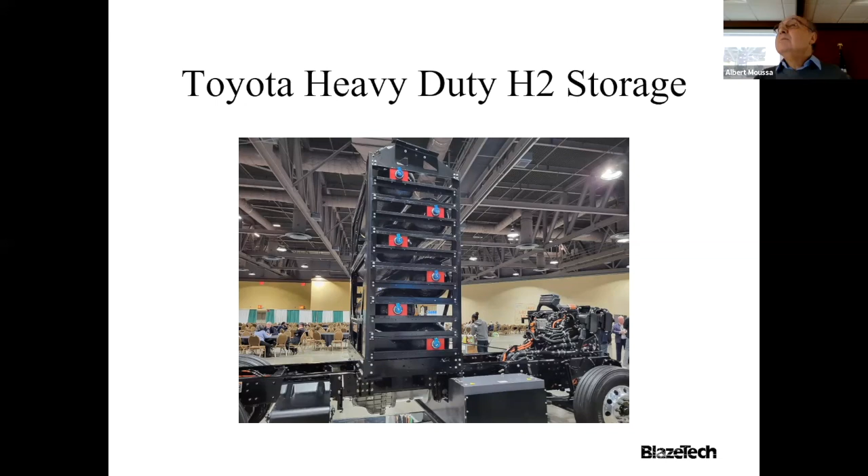The issue of size is very important because it's taking payload. Same in the plane as well. This basically shows you the powertrain and the storage.

Now, so much for cars, trucks, transportation. I'm going to make some comments about hydrogen use in the US.

There are 1,600 miles of pipeline of compressed hydrogen in the US, mainly in the Gulf of Mexico, serving the petroleum industry - you need hydrogen for cracking petroleum. Along with that, there's 10 million metric tons used annually in the US. Most of it is for petroleum, but some for fertilizer.

For fertilizer, you use hydrogen and the nitrogen in air to produce ammonia. So be careful - people want to use ammonia as a carrier of hydrogen, but that hydrogen came from somewhere initially. How was the hydrogen produced? If it came from decarbonization, from electrical processes, then you've got to account for all these processes and the efficiency term to make sense out of it.

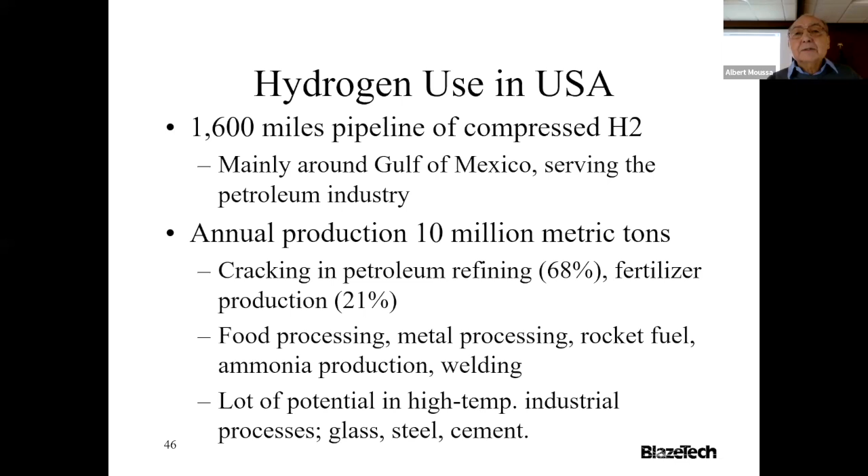Now, there have been hydrogen accidents worldwide, and there is an organization out of DOE called HIAD, the Hydrogen Incident and Accident Database, which collects all sorts of information. It's operated jointly with the European Commission.

Developed in 2004, containing a whole bunch of profiles of accidents. Some were fatal, several were fatal. Even in 2010, there were 7 people dying in a refinery that used hydrogen.

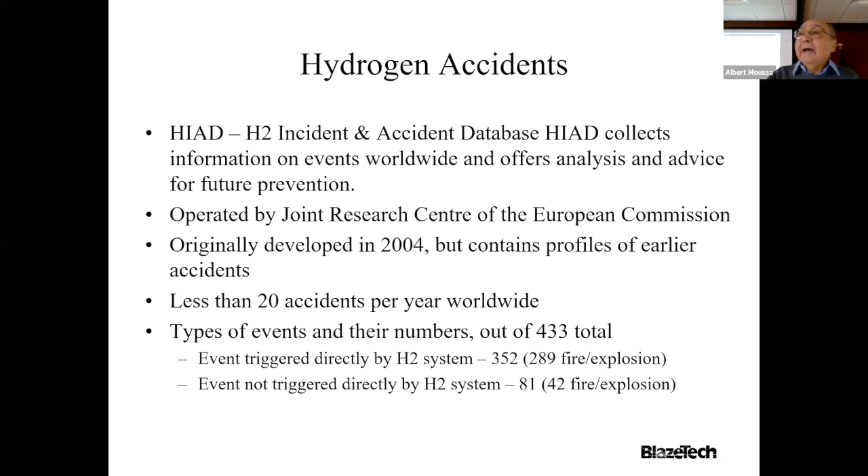Generally, if you look at the statistics, it's about 20 accidents per year worldwide. When you look deep at these accidents, 352 were directly related to hydrogen, and 81 were really cases where hydrogen burned because something else ignited stuff, so hydrogen was a victim. But still, out of the 352, about 300 were fire and explosion. So you can't just say hydrogen will come out, it's light, and air is going to dissipate it. Well, it depends on what comes out where, at what temperature, under what conditions, and what else is around.

Now, the safety record in the petroleum industry has been good, as a chemical. The mitigation and protection methods have been developed, and best practices are available and followed in the petrochemical industry.

Actually, what I presented for the crash of planes, given that I ignored how much fuel comes out of the plane, given the accident detail, what I presented would work very well for stationary storage tanks. If you've got a tank that big and it spills, you get a pool fire of that size, it could disperse, etc. The plume, the fire will be applied. I think we could learn a lot from the petroleum industry and apply it to hydrogen, to the new uses of hydrogen.

Now, as a fuel or a fuel carrier, some people like to call it that, I think that's semantic. In new industries, they don't have knowledge or practice with these mitigation and protection methods, and you need to adapt them. What works in a stationary situation may not work for aircraft. And after adapting them, you need them adopted by the new workforce, which means you have to retrain the people at the airport dealing with hydrogen, etc., and even the UAVs if they use hydrogen for air taxis.

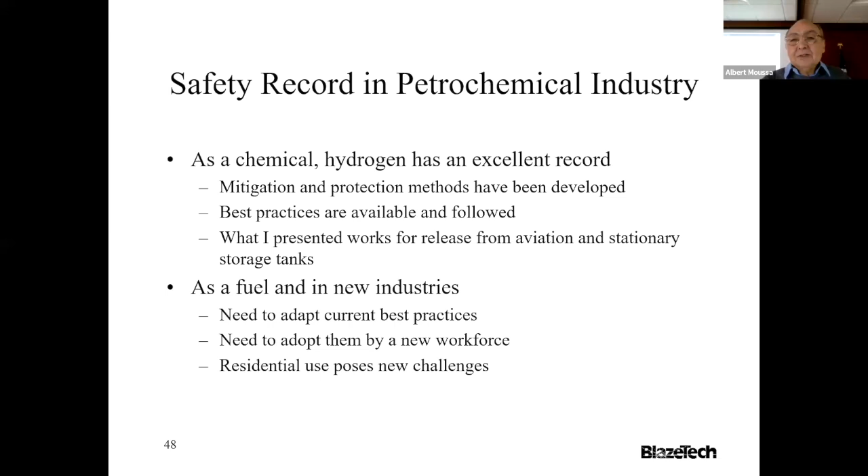And residential use poses new challenges, because how are you going to train people if they're having hydrogen and natural gas coming to their home and it could leak? That's an issue that deserves attention.

Because of that reason, I have prepared a course on hydrogen, and it's being offered in August of this year. It looks at the exceptional properties of hydrogen. You can't just say, well, I know gases—hydrogen has some special features. For example, under some conditions it has a negative Joule-Thomson coefficient, if you remember that from thermodynamics.

We look at hydrogen as a fuel, accidental releases from pressurized versus cryogenic tanks. We look at fires in the open or inside structures, explosion, and what kind of hydrogen safety assessment can be applied in transport or in basic stationary facilities.

And the big concern I have now is data centers, because of artificial intelligence—data centers are coming everywhere, and they are going to use up so much energy. I would think if you look at the utility per unit energy, it's probably zip—they're going to make money per unit energy, but not utility from why they're doing it. But anyway, one has to be very careful, because if you get IT people managing energy systems, they need training as well.

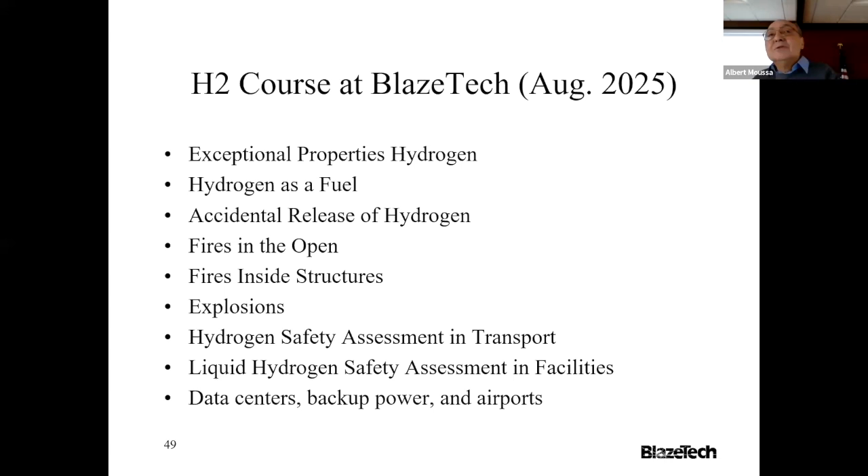Okay, well, thank you for listening, and I'm happy to answer any questions.

Well, thank you. I just have to say that was some really comprehensive and insightful presentation. Thank you, and I have so many questions. Okay, go ahead—but I'm going to open it up, and I want to start with two questions.

You know, I have done some work on materials of construction of hypersonic vehicles, this in relation to the U.S. Space Force. These are vehicles that fly at, say, Mach 5 and up. And you talked about the use of hydrogen in commercial airliners, like the Continental flight.

Is there a risk-benefit analysis that should be performed? If you're talking about national defense, that's one thing. If you're talking about commercial aviation, do you have any reservations about commercial aviation using hydrogen as a fuel? You're the expert—okay, so I want your opinion.

I'll answer it with a real fact: when we wanted to replace these ozone-depleting fire suppression systems worldwide, because of the ozone hole, if you remember all that, the agents in the refrigerant were replaced. There was a clock—you had to do it by a particular time. They put a similar requirement on airplanes, and then they relaxed it. In other words, they couldn't find anybody to replace halon. I think the same thing is going to happen with airplanes, meaning decarbonization is a big push.